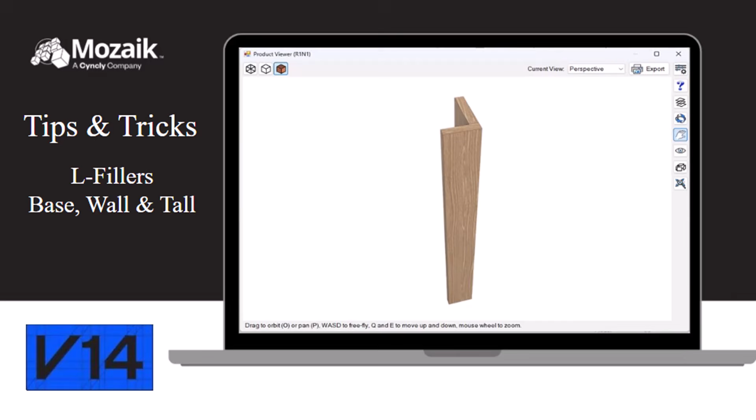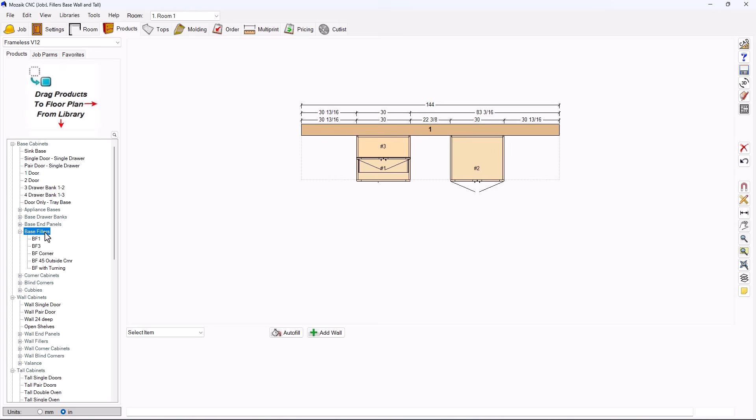In this Mozaik tips and tricks video, I'm going to show you how to set up a parametric L filler that you can use for your base cabinets, wall cabinets, as well as your tall cabinets. You can see right now I am in the Frameless V12 library, and if I scroll down in the product library tree, you can see I have a heading here called base fillers.

I'm going to select the BF3 and I'm just going to drag it on to wall number 1, and you can see my finished ends right now are currently set to none. What I want to do is be able to set this filler up where I've got like a 4-inch return on either side and save it to a base filler. I want to save it to a wall filler as well as a tall filler.

What I'm going to do right now is I'm just going to switch these finished ends to both. And what you can see now is it adds those finished end panels that I want, but obviously those are too tall. Let me bump it over here to the base cabinet and scroll in. And I would also like to have this filler saved where it came out flush with my doors. So I'm going to go ahead and just outset this right now to 7/8 of an inch. That way I take into consideration my bumper silencer as well as the thickness of my door.

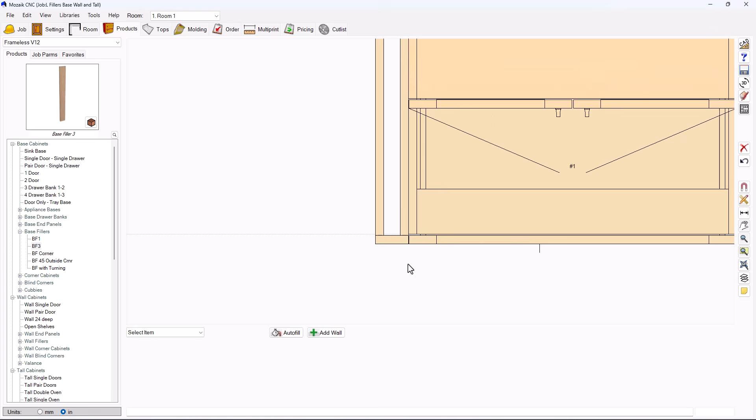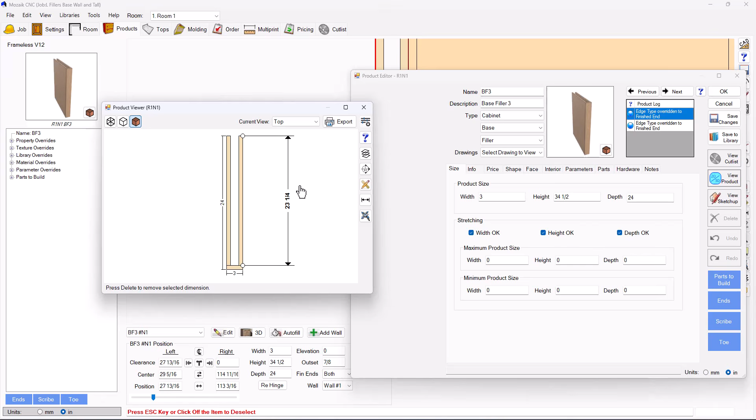Now let's go ahead and select the filler and let's double click on it and bring it into the product editor. I'm going to move the product editor to the right and select the 2D, 3D viewer and move it over here to the left. If I select my measuring tool and put a dimension here, you can see this filler end is actually 23¼ inches. If I go to the parts tab, you can see the finished end left and the finished end right are both 23¼ inches in width.

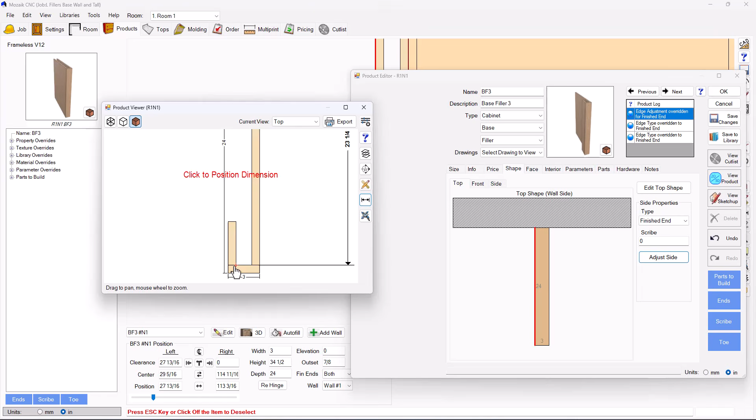Let's go back to the shape tab now, and I'm going to select the left side of the cabinet first. Now with this end right here being 23¼ inches, I would like this return to be 4 inches. I'm going to select the adjust side, and on the left end adjustment, I'm going to minus 19¼ here. Now, if I use my measuring tool again, you can see that now my end is actually 4 inches.

Let's go ahead and go to the right side and adjust side. This time, instead of doing the left edge adjustment, I'm going to move it to the right edge adjustment, minus 19¼, and that also moves that end in 19¼ inches. If I go to my parts tab, you can see now both my left finished end and my right finished end are both 4 inches.

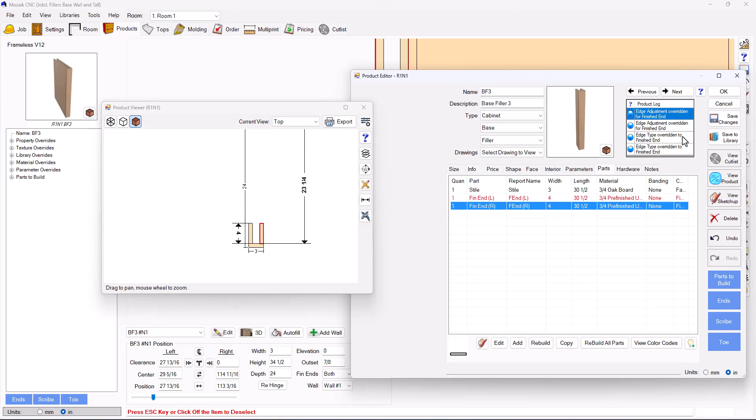So if I select OK right now, this is the filler I want to have for my actual base cabinets. And you can see if I turn my finished end to the right, the left L goes away and I can attach it to the left side of the cabinet, and I could also change that to the left and move the filler over to this side.

Let's go ahead right now and just select none and double click on this filler, and I'm going to go save to library, and I'm going to add a new product. I'm just going to call this BF3, and I'm going to call it an L filler. And there we have it. Now, if you look up here, this is actually set to a base cabinet. I'd like to change this and modify this to have it set up for my tall cabinet.

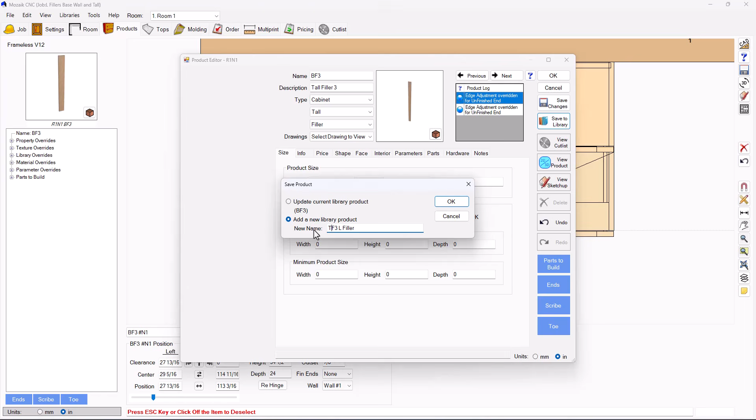I'm going to drop the menu here, which is my subcategory, and I'm going to select tall. I'm going to go ahead and change the height to 84 as we have it here. And instead of a base filler 3, I'm just going to call this one a tall filler 3 and go save to library again, add new product, and I'm just going to call this a TF3 L filler so I know exactly what this is and select OK.

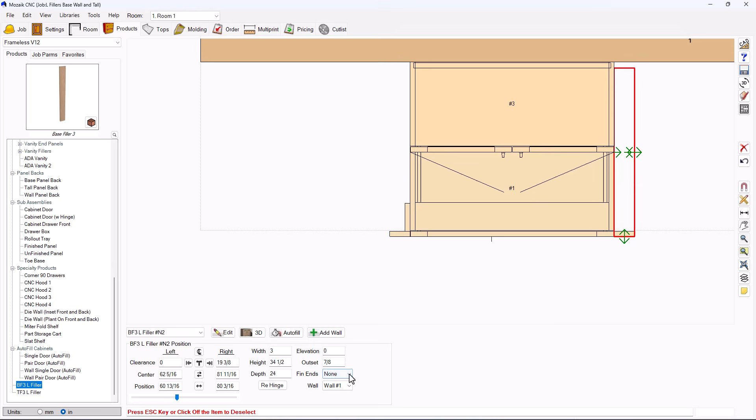Now both these fillers are currently added to my library. Let me go ahead and delete this one, and I scroll down to my product library. And I can bring my filler in, and let's say I bump it to the left side of this cabinet. I could select the right finished end, or I could put it on the other side of the cabinet and select the left finished end. As you can see, it automatically adjusts to the depth of my door.

Let's go ahead with the tall filler, and let me bump it to the tall cabinet and change my finished end to the right. And bring another one in on this other side. And we're going to set the finished end on the left. And you can see how that adjusts, and it's already adjusted to the depth of my door. Let's go to the 3D viewer and take a look at this.

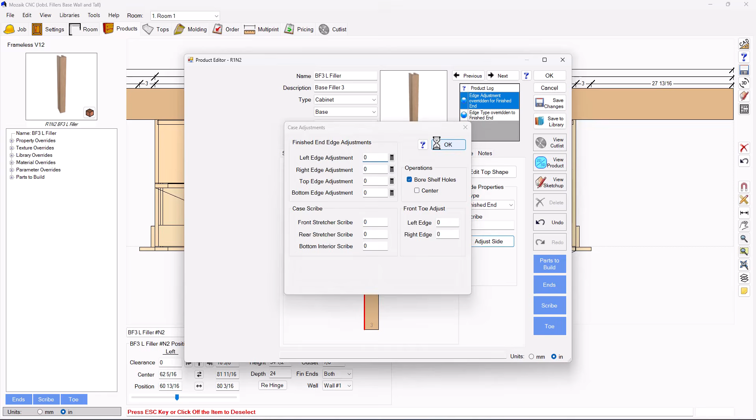Now that I have both the base fillers and the tall fillers already set up, let's go ahead and set up another one for the wall cabinets here. I'm going to go ahead and change this to both ends finished, and I'm going to double click on the base filler again. This time I'm going to go to the shape tab, and what I want to do is go to adjust side, and I'm going to take the adjustments off of this product real quick before I make any changes. Then I'm going to go to my size tab, and I'm going to call the depth 12 inches.

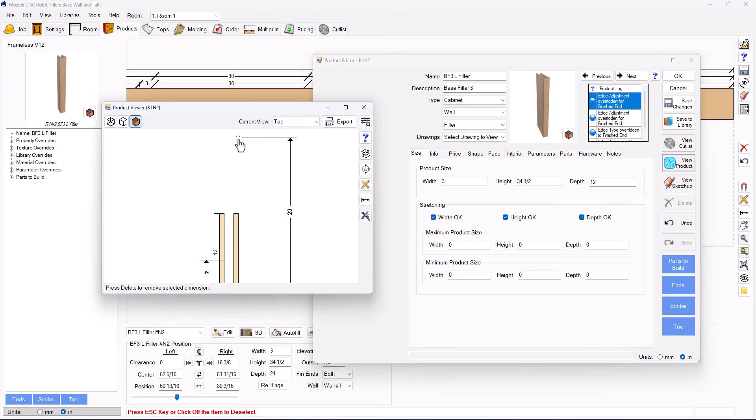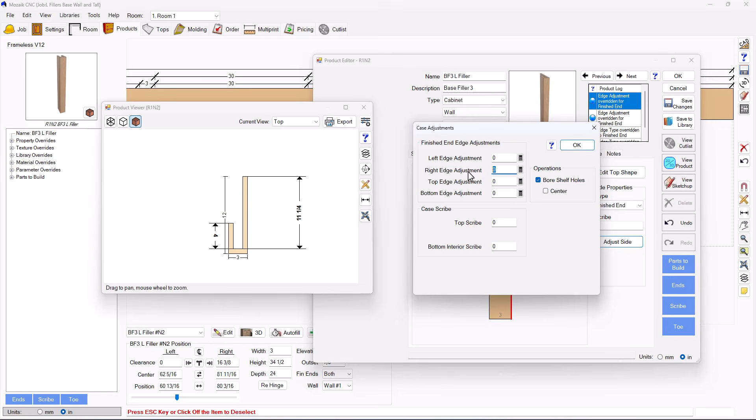As you can see, I'm also going to change this to a wall cabinet, and there we go. Let me go ahead and move this window over, and let's take a look at it. So if I look at my measuring tool for this side panel, my panels are 11¼ inches deep. As you can see, 11¼. Let's go back to the shape tab, the left end. I'm going to go to adjust side, the left edge adjustment minus 7¼, and that's going to bring that down to 4 inches. And then the right side, let's go to adjust side, the right edge adjustment, 7¼, and select OK.

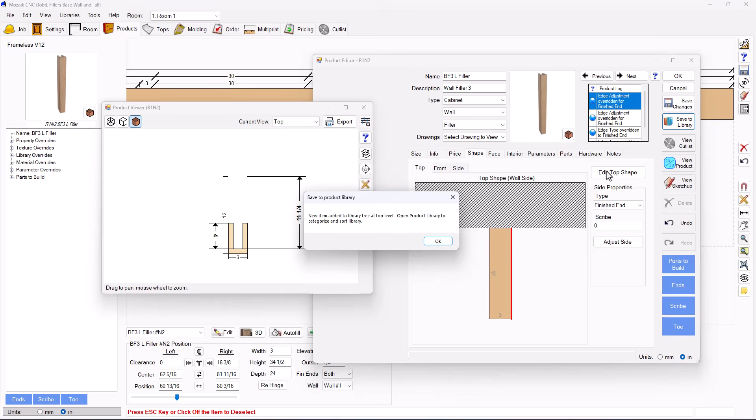Now we changed it to a wall. Let's go ahead and change our description. Wall filler 3, save to library. And let's just go ahead and add this as a WF3. And let's just call this an L filler. And select OK. And there we go. Now select OK again. Let's go ahead and delete that filler.

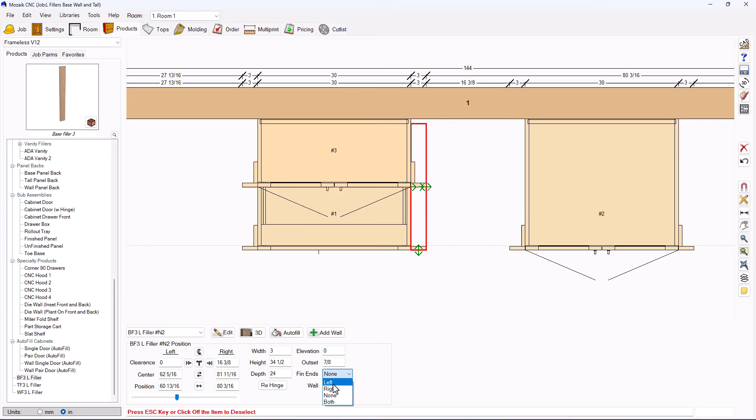Scroll down. And this time I'm going to bring in my BF3L filler. And if I want it on that side of the cabinet, I can say finished end left. And watch this. I will plop it onto the left side of this cabinet. And I can say finished end right. And there's my base filler. Let's put this one back in there, finished end left, and let's go to the 3D viewer.

So you can see these are automatically parametric and adjusting. You do have a way to screw the fillers to the side of your cabinets while doing frameless cabinets. And we have one set up for a wall, base, and tall. So go ahead and go through this process and you'll learn how to modify some fillers as well as other cabinets.